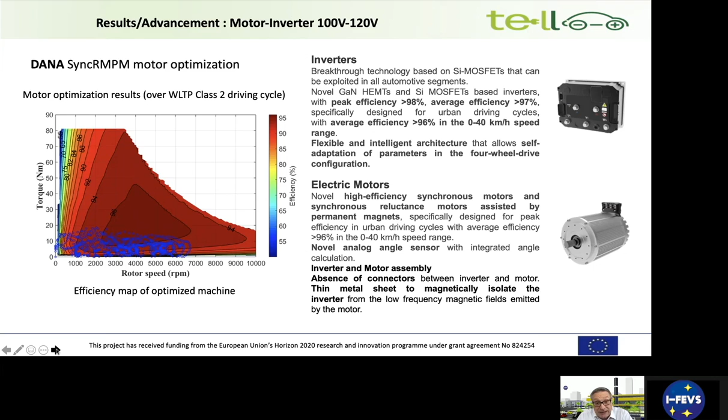In terms of result, let me start from the motor and inverter. The inverter is particularly highly efficient, with a peak efficiency of 98%. But what is very important here is that we have an average efficiency of 96% at very low speed, because we are addressing primarily urban mobility. Similar performance is also in the electric motors, where we have 96% efficiency at a very low speed, which is the state of the art.

Why are we focusing so much on the 4-wheel drive? Because there are several advantages. Here we have improved acceleration and improved climbing performance, improved energy recuperation, and also excellent fail-safe properties. Having 2 identical axle systems, we have a sort of ideal mass distribution, but what is also very important is that we have an active control of the front to total wheel torque distribution, which is improving the steady state and the transient cornering response. This is particularly important in view of future automated driving.

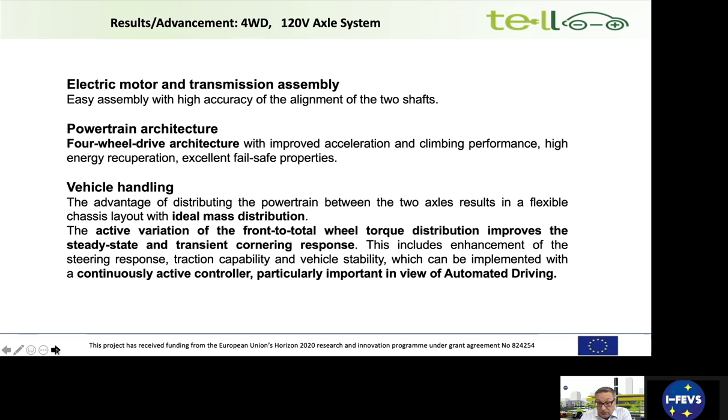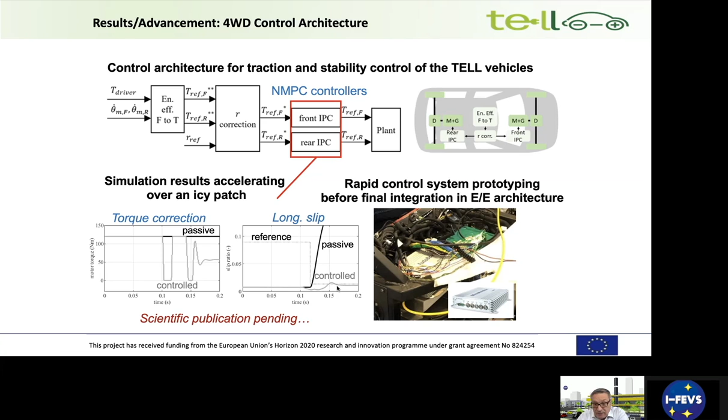We have control in the 2 axle systems independently. What does it mean? In the simulations and also the real implementation on the road, if we take an example of an icy patch, controlling the 2 axles independently from one another, we can limit the longitudinal slip when we have acceleration. This is an example of the passive case, so no control at all, where we have a rather large longitudinal slip. Controlling the 2 axles independently, we have a very, very reduced longitudinal slip. A specific publication will be made in a short time on this aspect.

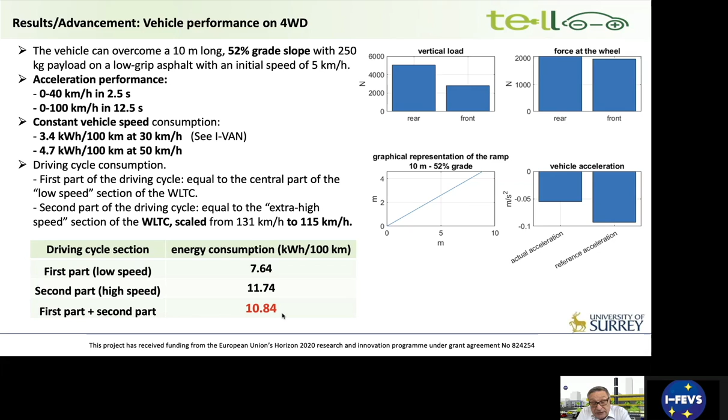In terms of general vehicle performance, the 4-wheel drive allows more than 50% grade slope. We have an acceleration of 0-100 km per hour in 12.5 seconds, which is quite acceptable in urban mobility. Very important is also that at a constant speed of 30 km per hour we use only 3.4 kilowatt hour per every 100 kilometers. Now, in the WLTC cycle, scaled because we have a limitation at 120, we have a total consumption in the cycle of 10.84 kilowatt hour per 100 kilometers, which is quite a good control of the energy consumption.

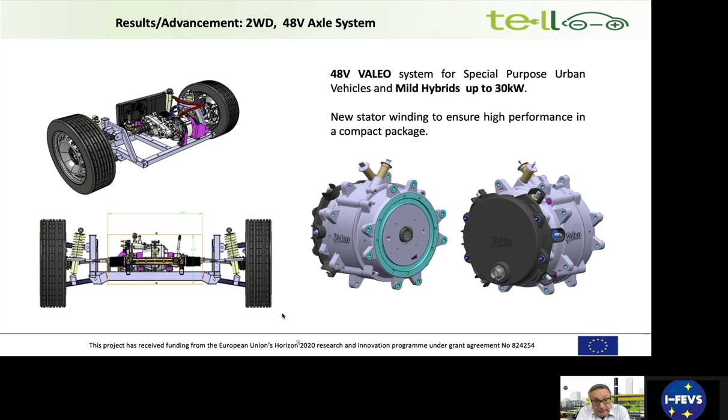Now we also have a development in this project in the low voltage, specifically addressed by Valeo, for special purpose urban vehicles, together with I-FEVS in this case, and mild hybrids with motors up to 30 kilowatt. The picture here is presenting a specific motor, indeed at 30 kilowatt, which is water cooled, and on the left side you see the integration on 1 axle system.

Now, very important when referring to safety and affordability is the way we are approaching the design of the body frame. We can design the body frame in minutes now, after several years of development, of course. And what is important is that the peak acceleration in a full frontal crash test is in the range of 40 G, which is 10 to 15 G less than what you can find in commercial cars on the road today.

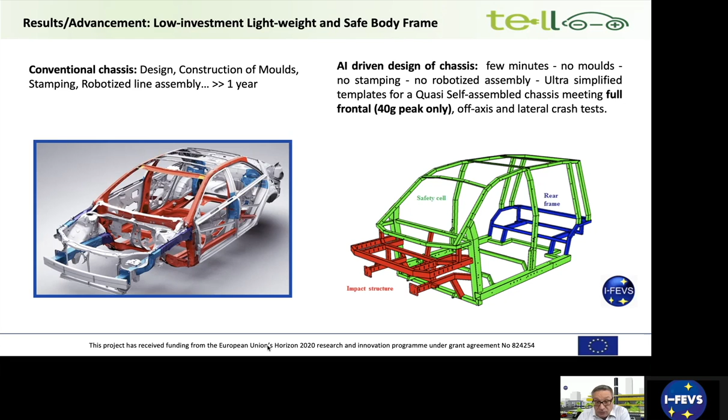Very important when we're addressing affordability is also the fact that what you need to develop this in a manufacturing line is an investment of a few millions only, compared to the 100 and more that you have with a conventional approach. So much faster and much cheaper.

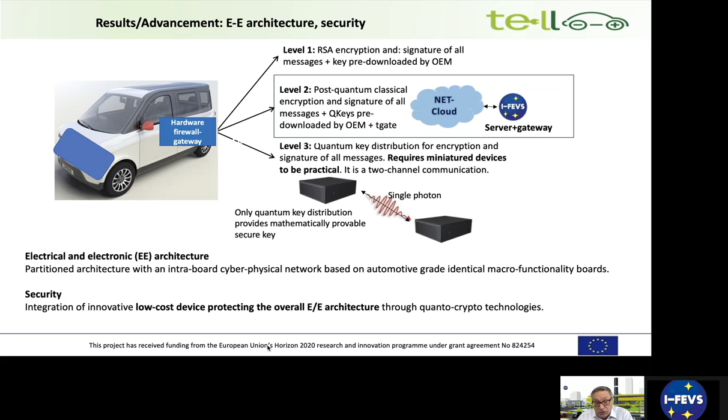In terms of security, there are several approaches possible when you try to upgrade your software over the air. We are applying post-quantum classical encryption plus pre-downloaded quantum keys, and introducing also a time gate. We say that our approach to secure the transmission of data is proof against the forthcoming quantum computers, which is also a very simple and extremely effective approach to secure the communications in our vehicle.

Now, we developed two vehicles. One is developed in common, specifically for the battery pack, with the project DeMoBat that we present later on in this conference. And then we also developed what we call less than zero emission, as a provocation, of course, in airports and ports, because indeed, on many days, you can produce more energy than what you need for the mission in those specific locations. So the two vehicles have a common platform, which shares the body frame, the doors, the powertrain, the battery pack, the ADAS system, and essentially almost everything.

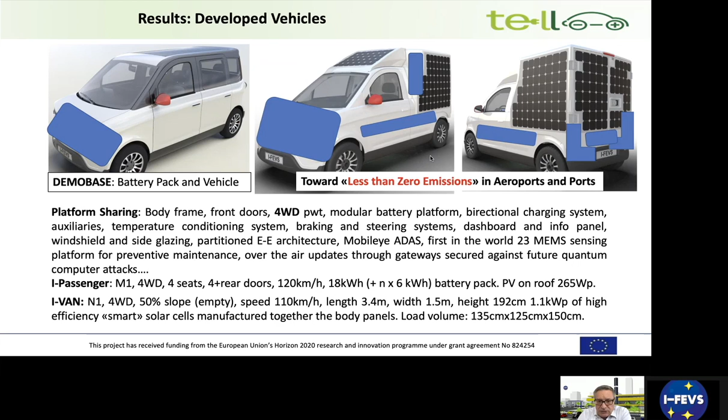We also have a 23 MEMS sensing platform for preventive maintenance. So we have two vehicles. The passenger one is at 120 kilometers per hour. It has a modular battery pack. We go by layers; we call it the lasagna system, our approach developed inside the Demobase project. And in the iVan, we have 1.1 kilowatt of solar panels installed, which in many locations allow an extra range, which is not so secondary an aspect.

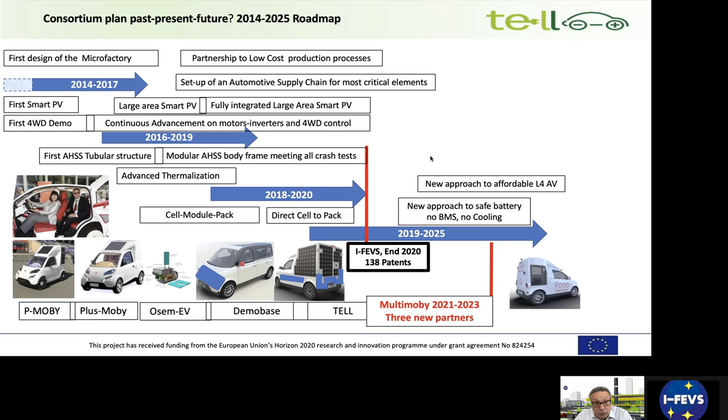Now, we were asked what plan we have. Well, there is, of course, a sort of roadmap that started a time ago. We developed several vehicles. In 2020, we have 138 patents granted already. And in the new project that is starting the 1st of December 2020, we have introduced 3 new partners aiming at the development of an affordable L4 automated vehicle and a novel approach to develop safe batteries without BMS and no cooling.

Now, there was another question related to the market. Where are we now? Well, let me provoke the system saying that we are ready and we are taking orders now for iVans, this one that you see in the picture. And we also said to the European Commission that at a Chinese-like competitive price, we can sell you 25 vehicles before the next edition of this conference. Of course, we are not addressing primarily the production of vehicles. Our real product is the microfactory, and together with our partners, we are proposing this concept with a certain success, I would say.

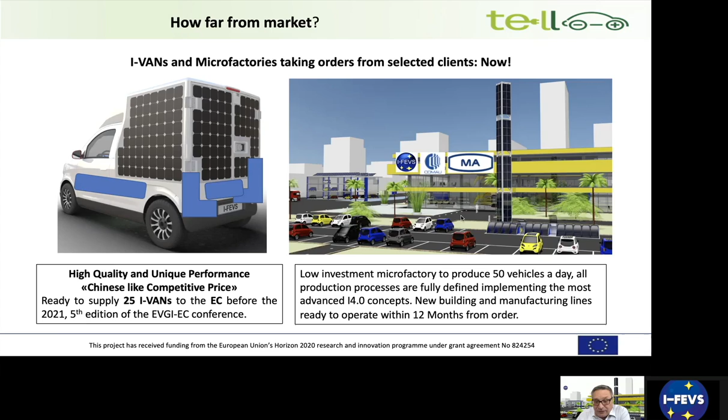What we say is that the new building and the full manufacturing lines can be operated within 12 months from the order. Well, at least for I-FEVS, which is an SME, everything has been possible only thanks to the financial support of the European Commission. So what we can say is a big, big, big thank you to the European Commission.